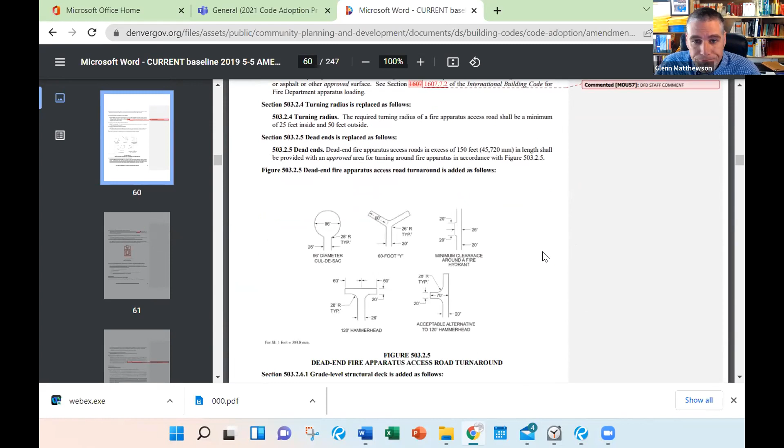Where was that one? Up. Next page up. One more page up. And right there, yeah, at the bottom, exception, low profile bikeway elements. So that seems to be existing language that is speaking to what you guys are talking about, yet this is referencing the width dimension, not the turning radius dimension.

All right. Anybody have anything they want to add before I call a vote? I know you're reading and looking and there's lots to go over, but we also need to move forward. So where am I at? Where's the proposal?

Oh, nope, that's not it. Okay, I am going to call the- is this the one that I just modified? No. Gee whiz, I have too many things open here. This one. All right, this is the modification right now. Any last comments? Because I'm going to call the vote. Doesn't look like it. All right.

All those in favor of this proposal number 75, as further modified by the highlighted section you see on the screen, where approved by the fire code official, pedestrian and bicycle facilities shall be permitted within the required turning radius dimensions of fire apparatus access roads. All those in favor, please raise your hand.

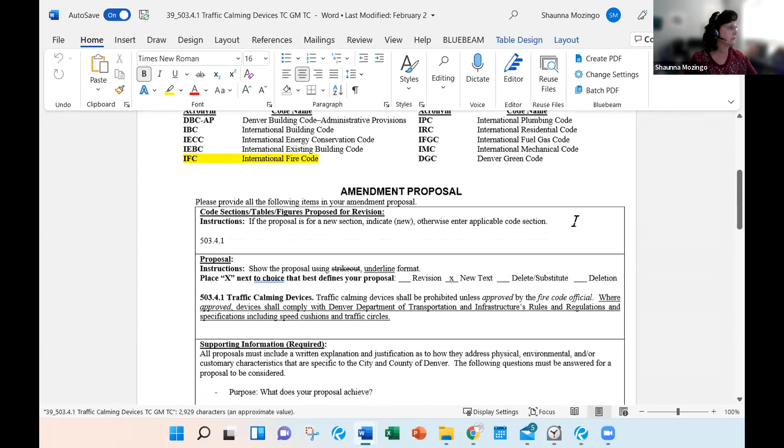Okay, next on the agenda, item number 39. We haven't talked about this one, so this is a new one. Tony, this looks like your proposal. Do you want to speak to this one? There you go. Yes. All right, section 503.4.1.

So we'd be modifying it again to acknowledge what DOTI is attempting to do, including speed cushions and traffic circles, acknowledging that those are acceptable within our routes. So the proposal would read: traffic calming devices shall be prohibited unless approved by the fire code official. Where approved, devices shall comply with Denver Department of Transportation and Infrastructure's rules and regulations and specifications, including speed cushions and traffic circles.

Thank you very much. To the public, for testimony in support of this proposal? Anybody? Testimony in opposition? Anybody wishing to speak in opposition to this proposal? No? All right, committee, any questions of Tony?

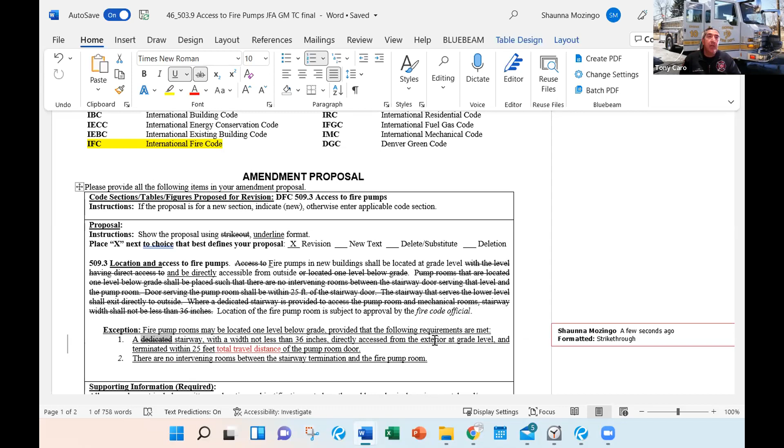I think historically we've seen exit stairways utilized, which by default would have a rating depending on the number of floors interconnected. So it's typically 1 hour or 2 hour rated enclosures. If we say exit stairway, is that sufficient, or does stairway imply that it's an exit?

Where are you wanting that? Right here? Okay. I think, Mike, they still could use a dedicated stairway if they wanted. And if you're only interconnecting those 2 levels, you may not need a rating. Yeah, so I think the way it reads would cover both conditions.

Shaunna, do we need a motion to modify, or can we modify language now? Yeah, I would take any kind of motion. You could say you want a motion to further modify by what we've already done, or modify it even further. Or can we continue to modify? Yeah, we can continue. Just say you want to move to further modify, and then you can keep modifying however you want to. The motion would be great. Okay, so I'll make a motion to move to further modify. Okay.

Second. All right, so there is a motion for as modified with the intent to further modify. Tony, do you want to talk about that modification?

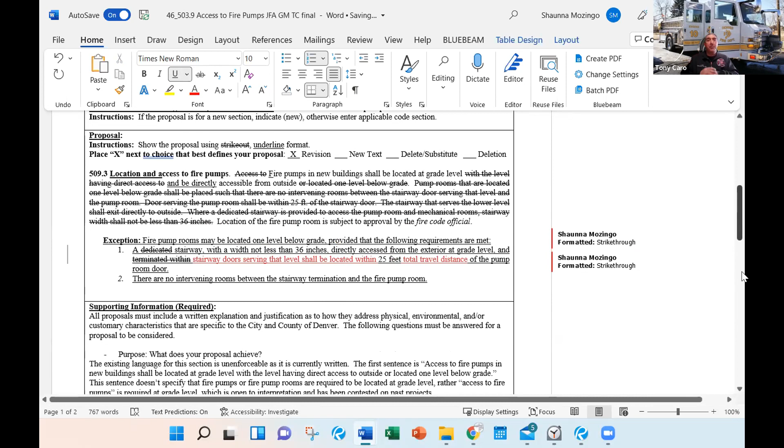Yep, thank you. A stairway with a width not less than 36 inches directly accessed from the exterior at grade level, and stairway doors serving that level shall be located within 25 feet total travel distance of the pump room door.

I don't think doors should be plural, should just be stairway door. Yeah, door, yeah, I agree. And the stairway door serving that level?

I don't know, how do you enforce that if you don't have a stair enclosure? If your stair is open? Well, isn't this referencing a measurement to the exterior door that opens to the stairway?

So are you saying if you had an open exterior, open air stairway? Well, stairway door, typically, most of the places in the code where they talk about a stairway door, they're talking about a door into the enclosure. Right, and you might have a stairway that is not enclosed on the inside of the building that's going down to the pump room. And you're saying from that door there, but what if there is no door? It's not an enclosed stairway. So the base of the stairs or the...

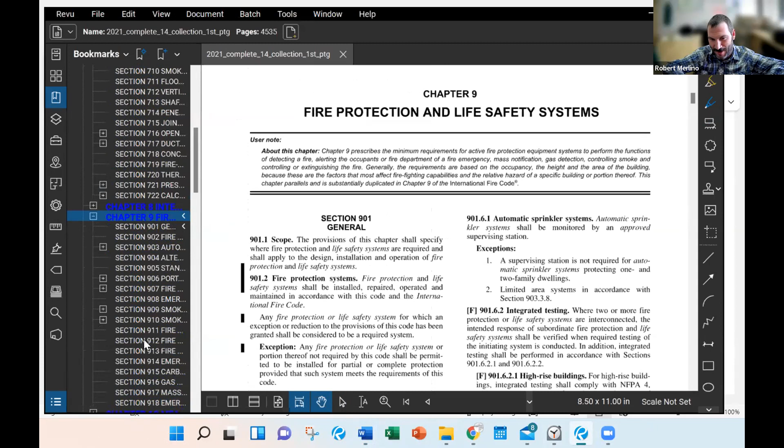Could you bring that section up? Of the IBC? Yeah. I think that section's controlled by the fire code committee, right? So the fire code has it, but it just references back to the building code. What did we say, 913? NFPA 20 speaks to the rating of the access.

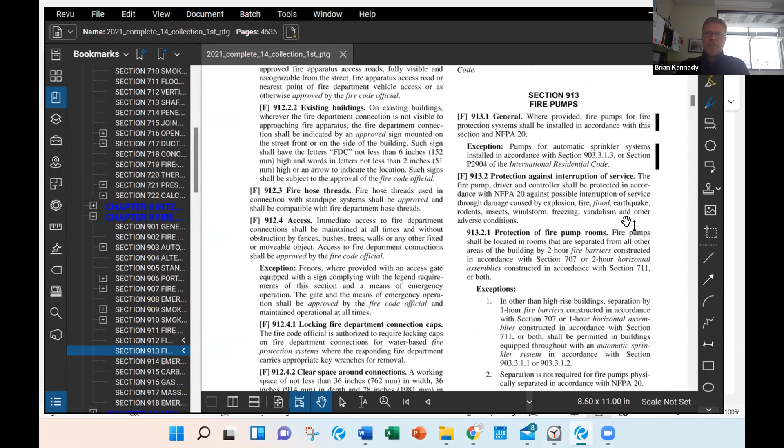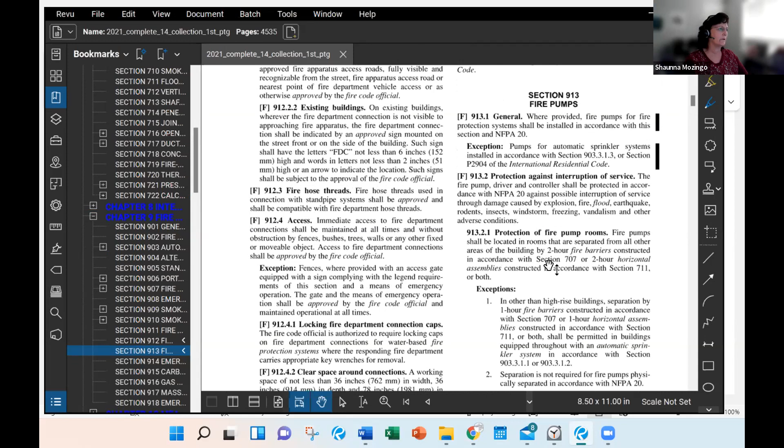Is this the section you said, 913.2.1? Yep. Because that's requiring... oh, well, I guess there are some exceptions. So there's a requirement for a 2 hour rating. There's a 913.2.1 in the fire code as well. It should be the same.

It doesn't talk about the path to the pump room, it just talks about the pump room itself. NFPA 20 says that portions of the building needed for access are required to have the same resistance rating as the fire pump room.

Yeah, that's what I'm saying. It's referencing you to NFPA 20. I don't know why we don't take that NFPA 20 language and put it in there instead of trying to create language. Yeah, I guess I would have to agree, if that's the intent. I'm a little surprised that is the intent, I don't think it was meant to be that way when we initially put that section in there. But if that's the intent going forward, just point to NFPA 20.

Brian Kannady. Yeah, I was mentioning the NFPA 20 with the equipment access. Yeah, okay, I see your hands are still raised, so I didn't know if you had something else. All right, so we could take the wording out of NFPA 20 and put it here.

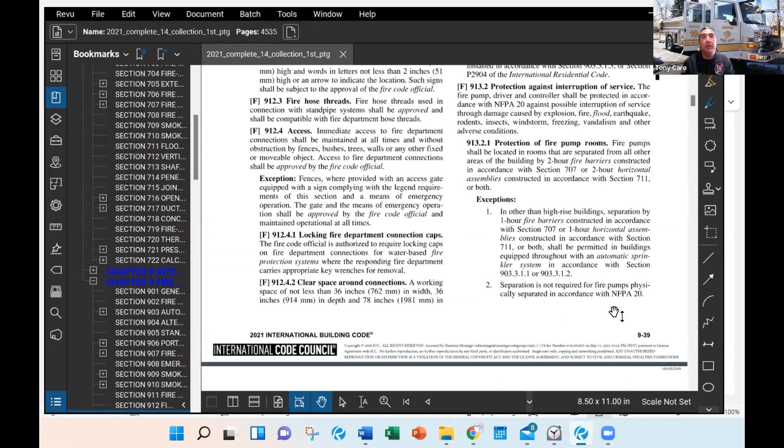Yeah, and I think our section just captures that we intend the path to be protected equivalently, correct? Right, egress from the exterior, not from the stair, but from the exterior, right? Should it say access path? Because it's not really an egress path.

Right. Do you know what section of NFPA 20? Yeah, that's standby, it's in the appendix. I'm looking at section 5.2. I was looking at 414.2.1, 2.12. 414.2 is what I'm looking at also, of the 2022 version.

All right, George. I think possibly we're overthinking this. We're spending a lot of time rewriting it with more words than what was up there in the first place. And what was up there in the first place has been dealt with for the last 15 or more years. I think Michael brought that point up, that pretty much most designers have a supposition of what this means. At least at this point, trying to come up with wordsmithing with less words or more simplified words or some other direction.

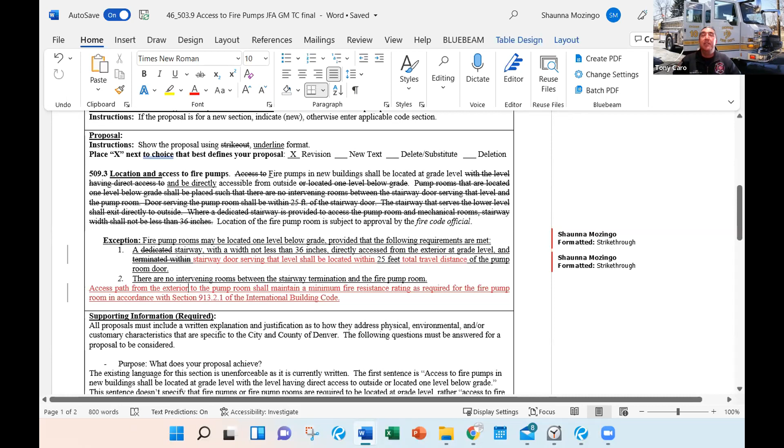Tony. Yeah, I think we're really close, and this would really help architects who are laying out the rooms and doing these fire pump room designs, because most of them are not familiar with NFPA 20 and don't have NFPA 20 available. So I think if we include this language, it's really beneficial to them.

Robert. Yeah, I'll throw another wrench in this. Reading further into NFPA 20, specifically about access to the fire pump room through other parts of the building, NFPA 20 gives you an out to not require a rating that would contradict what's being required by the IBC, or potentially what we would write here, and whether we would reference the IBC or NFPA 20. So I think it's important to clarify this, but I also think it requires some more thought in how it's written.

Okay, I would add to that real quick, looking at NFPA 20, it uses the term fire resistant rated corridor from an enclosed stairway or exterior exit. So there is certainly some different and critical language used in NFPA 20 that's not being used in this current proposal, and it gives you an out. I guess that's to address Brad's concern. We haven't always had it required to be protected. If there's an out for it, is that something we could consider as well?

So the specific language is: where a fire pump is installed in a parking garage or some other portion of a building separated from the rest of the building by fire rated construction equivalent to the pump room, and the portion of the building containing the fire pump is protected by a sprinkler system that does not rely on the fire pump, the protected access to the pump room shall not be required.

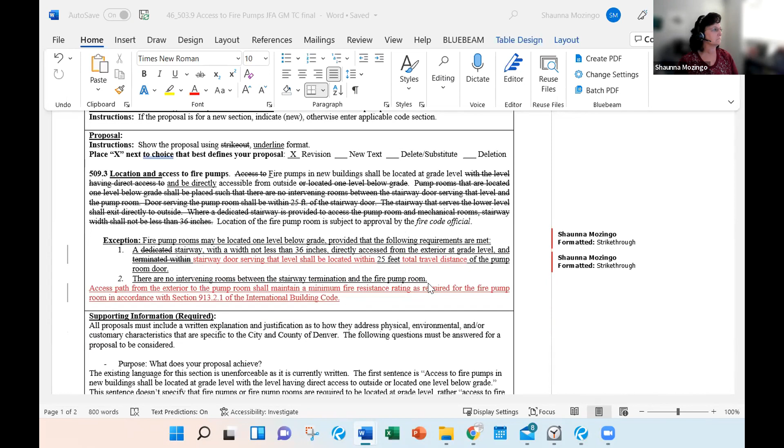All right, we've got to come to a decision right now. We're either going to table this or we're going to move forward. The motion on the floor right now is as further modified, so I would need a new motion to table, or we need to figure this out. A motion to table this, and I'm happy to be involved to help rewrite this if we want to continue to push this forward.

Second. All right, so a motion to table it. Whenever we table something, we have to have a date specific. So do you think this is something you could tackle right away while it's fresh in your mind, and we can bring it forth at the next meeting? Yes, I would be willing to do that.

Okay, so we're going to put together a working group, which is going to include Robert, Glenn, Tony. Anybody else want to be on that working group? John. Okay, John, how do you say your last name? Wojcicki, like 'boy' and 'cheese.' Okay, just like it's spelled. All right, I just don't want to butcher people's names. So, Robert, Tony, Glenn, and John Wojcicki.

Gotcha, we're going to do that and bring it back for the next meeting. Sound good? All right. Shaunna, will you email this version here to us? Yes, absolutely, as a working version. Thank you.

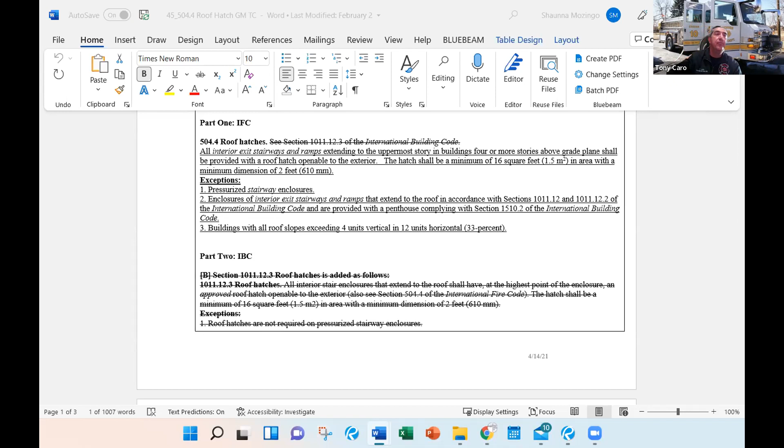Okay, thank you, Brian. Yeah, I agree with what John Wojcicki said, that it's common that when there's a requirement in the fire code that comes from the mechanical code, we see an F next to it, or vice versa. You can see an F in brackets in the mechanical code. So as far as your committee goes, I don't think this affects your committee's decision. I think this should be in the IBC committee when they hear this, to add an F in it. And I think the building code committee should consider that and add an F.

I don't believe you are voting on the IBC portion today. So I think as far as your vote goes, you should approve — my opinion would be to approve the IFC one and then add a note later. Or if I'm on that committee, I can recommend that you add an F to it if we can at this point. But I don't think that should sway your decision from passing this currently. Gotcha, good point.

Thank you, Brian. Anybody else? Yeah, you truly are not voting on this part. It's just there for your reference. This is what you're voting on.

All right, the motion on the floor is for as submitted. If there's no other discussion, I will call the question. All those in favor of as submitted? Now I have 13. A vote of 13. All right, let me lower your hands. All those opposed? All those abstaining? Nobody? All right, so item number 45 has been approved as submitted, 13-0.

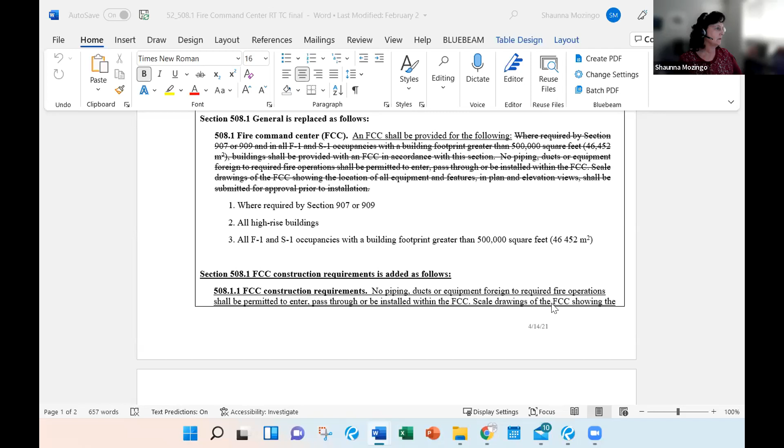Thank you. So this was intended because it's part of the second part. It was two rooms. One was a fire command room and the other one was a fire command center. We were trying to get specifics on the fire command center based on there was confusion with the fire command room, which is the next proposal. Oh, I see, so you have two proposals right in a row. One's for the Fire Command Center and one's for Fire Command Room. So this one that we're seeing right now is for the Fire Command Center.

Shaunna, could you add an additional .1? It looks like I missed that in the review of this section, 508.1.1. Thank you very much.

All right, any testimony, anybody else wanting to speak on behalf of the public in support? Anybody want to speak in support? Anybody in opposition? Opposition? Committee?

Hello, committee. Rich, I think this just addresses that the base code added F1 and S1 occupancies. I don't see any other change than that. Is that your perspective? Correct, right, because we were based on F and S1. There's been some million square foot F1, S1 buildings around that would probably benefit from having a fire command.

Yeah, a larger fire command. And then Glenn, if you can look at the numbering scheme, because we already have a 508.1, we already have a 508.1.1. I don't think we want to undo some of that in there. So just look at your numbering. But there's nothing in here that's taking anything away. It's just basically aligning to the current base code, which did add those two sections. Correct, that's correct.

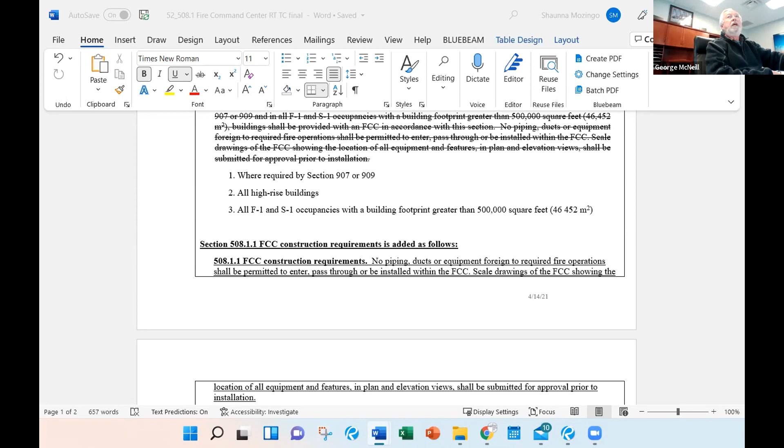Yeah, and Greg, we do need it because the base code doesn't have 909 smoke control driving a command center like we do in the Denver amendments. Thanks, Tony. I just wanted to make sure that the existing 508.1.1 location and access isn't intended to be removed for this. It isn't overwritten, and that's what I was referring to when I was talking to Glenn. Okay, thanks. I saw that too, Brian. No, that's my oversight, and we'll get that taken care of in final formatting.

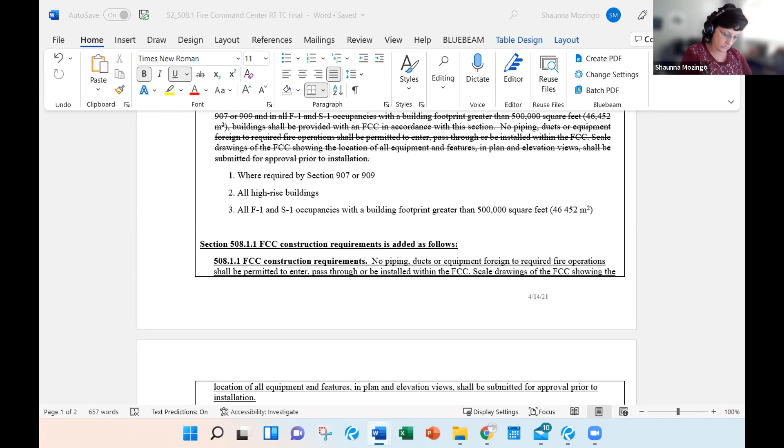And if this is the right place, getting things along, I'd like to approve as written. Make a motion to approve as written. Okay, approve as submitted. That's George. Is there a second? Second, and that was Brian. Glenn. No, not Glenn. Brian. Okay, Brian Kennedy, sorry.

All right, there's a motion and a second for as submitted with some apparent editorial stuff that we'll have to fix. I guess I would ask if you guys have any discussion before I go to the public. Nothing? All right, public, there's been a little bit of testimony, not a lot. So if you have anything to say about what we've just talked about, now's your time. Anybody wishing to rebut anything they've heard? Nope, okay, here we go.

Committee, it's been moved and seconded for item number 52 to be approved as submitted. Seeing no, well, you're raising your hands, there you go. All in favor. I'm not gonna wait. All right, awesome, that's a count of 13. And that's only people we have present is 13. So that has been approved 13-0.

All right, excellent. Let's go to then, that's going to save that because I have autosave on. All right, so that is item number 52. Now we're going to go to 52, or I mean 38, excuse me, 38, which is the rooms instead of the centers, right?

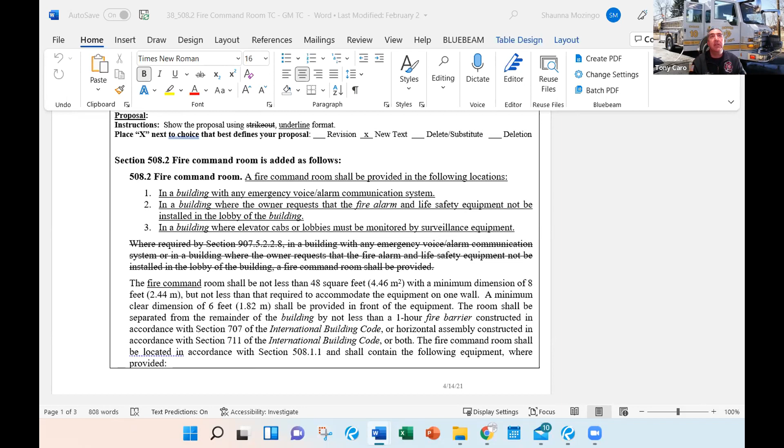Tony, you want to address that? So John, you're thinking there'd be confusion as to whether a room or a command center would be required? Because I think the prior section was clear - if you're a high rise, you have to have a fire command center.

Yes, and I would just say you could clarify by saying a fire command room shall be provided in lieu of a fire command center in the following locations.

Russell Holt: One of the confusions is in low-rise buildings, we don't have fire command centers, but we still have, at 60 feet, to have an emergency phone and some other apparatus at times. Sometimes with permitting, because of the layout of the building, they ask for a lobby panel. Instead of putting that in the lobby, a lot of times Denver Fire wants us to put it in the room they've designated - a fire command room. It's not really designated a fire command center because it's not high rise, but into a room as well, where the fire alarm equipment is.

Going back to the public, I have Brian Lucas. Thank you. I would just recommend adding where the requirement for surveillance equipment is required. Right now, that could apply if an owner chooses to install video monitoring in their 2-story building, and I believe this is required by the elevator code when the building exceeds 60 feet. I may be incorrect, but I'd recommend adding 'where surveillance equipment is required by ASME 17.1,' or if there's another section that requires it - because someone puts in surveillance equipment that's not required by the elevator code or the fire code, I don't think that's the intent here.

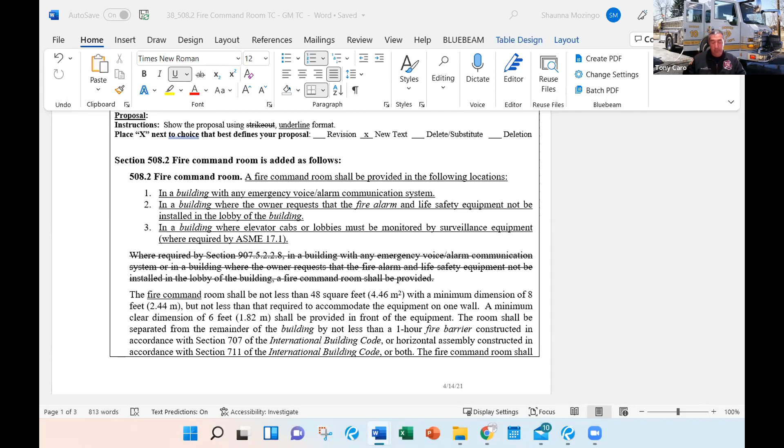No change there, George. I think this provision's been in the code for two cycles now. Well, I haven't been upgrading for two cycles - it's been relatively recent. Yes, I believe it's been in there since the 16 amendments. Well, you know how many we've done, and we've recently just done two. So I just want to make sure they've had an opportunity to see it.

Anybody else from committee? Somebody's phone is not muted.

Anybody else from committee? Yeah, I have a question on the wording of the room size. Is the intent to require a minimum dimension of 8 feet in two dimensions? Because if that's the case, that doesn't line up with the 48 square feet.

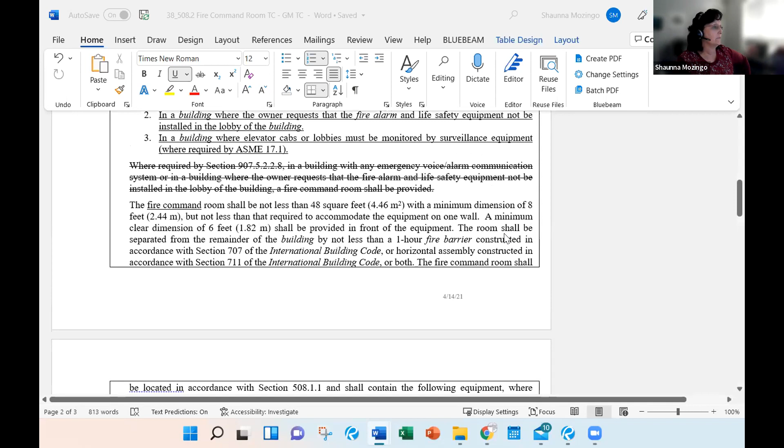Scroll up. This appears to be existing language. Yeah, that is existing - there's nothing being changed there. That doesn't mean you can't modify it, but no - it's an 8-foot wall with equipment on it, and you need to make sure you can back up 6 feet along that wall. It's 48 square feet.

So then is the intent that both walls measure a minimum of 8 feet, or just the one? Yeah, I think an 8x6 room, Robert, is the intent. Okay, just a little confusing.

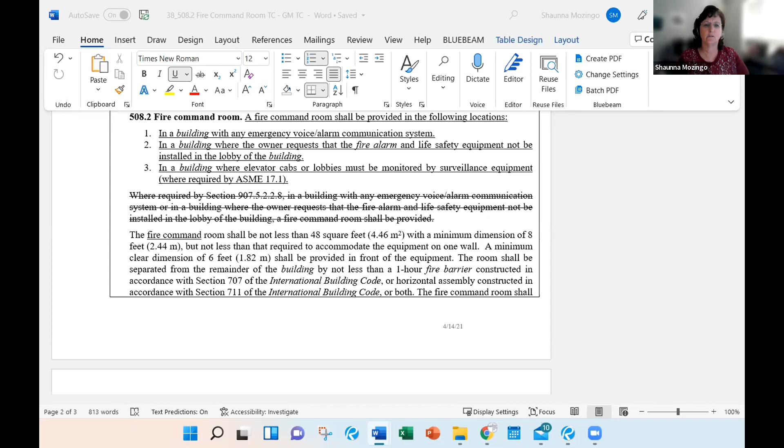Wayne, they decided to just have conversation between the committee - you don't have to raise your hand. Thank you for that, so I just wanted to make sure.

So I'm looking at the previous amendments, and as far as I know, fire command room is not defined, right? So I'm trying to understand - I think the intention here is that for a building that's not a high rise, not explicitly required to have a fire command center per 907 or 909, the requirement would be less arduous overall, but still maintain the intent of the fire command center.

Assuming that's all correct, the amendment alludes at the end there that the fire command room shall be located in accordance with 508.1.1. 508.1.1 is the fire command center provisions. So are we treating these as synonymous with one another, or should we define the differences?

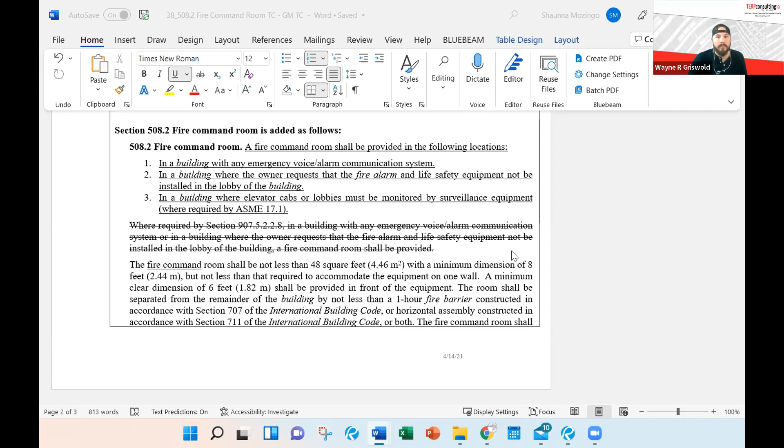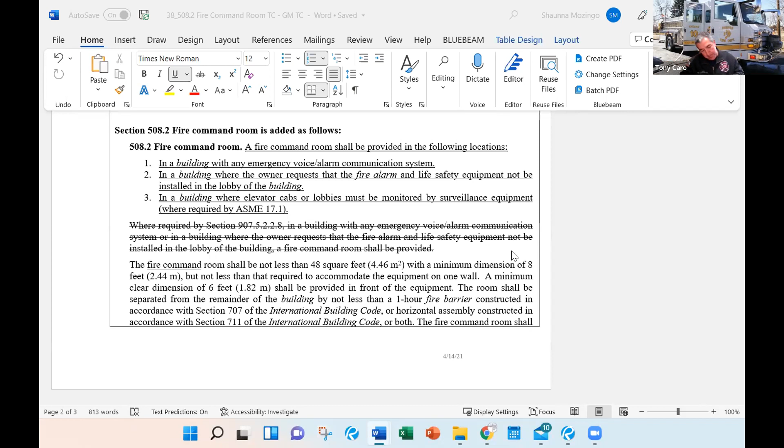Yeah, I think that's just referring you to the provisions that tell you where the room should be located, which has three items - be on the ground floor. Well, it tells you where the fire command center should be located. Yeah, and I think we're just referring to using the same location topics or parameters. Does that make sense, Wayne?

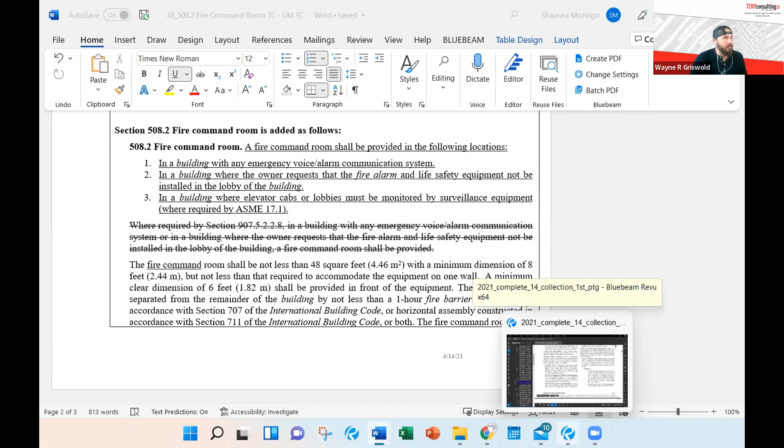So if we refer back to 508.1.1, it's location and access, right? So location then is defaulting to the F1, S1 occupancies over 5,000, 100,000 square feet. I'm not seeing - yeah, I think we need coordination on the sections. Well, that's kind of where I'm going with it. It seems like this fire command room, as it's defined, would not necessarily be the same requirements as the fire command center, if I'm understanding the intention here.

It would for location and access. For location and access, okay, access I agree. Location would just be - hold on, let me look back at the amendment. Yes, I think they have it up on the screen. Well, that right now on the screen is your current amendments, right? And then if you want, this is the proposal.

If I may add, I think some of the confusion is the term 'location' being used in 508.2. A fire command room shall be provided in the following locations - that's really not referring to a location within a building, and maybe that's a poor term. It's referring to the following buildings. So 508.2 is identifying the building designs that would require it, then pointing you to 508.1.1 for locations within said building.

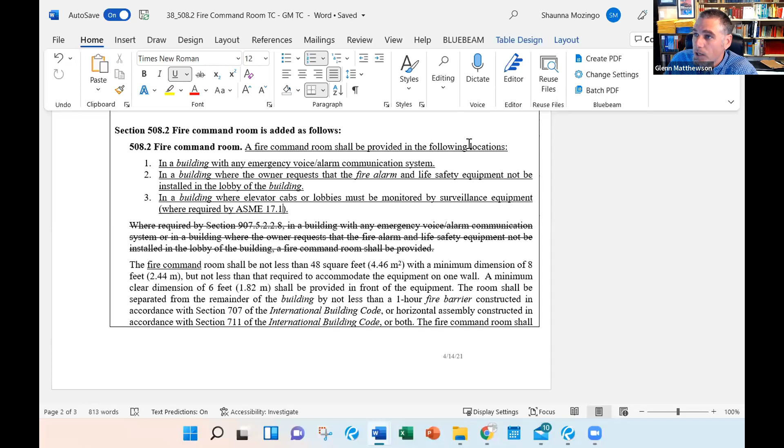Yeah, Glenn, do you think we should replace 'locations' with 'scenarios'? I do - I would, or 'conditions' or 'buildings'. You can simply say a fire command room shall be provided in the following buildings, and then we can clean up the use of the term 'building' in each of those three exceptions. But that might help clarify the differences between this term 'location' being used twice. Yeah, good point.

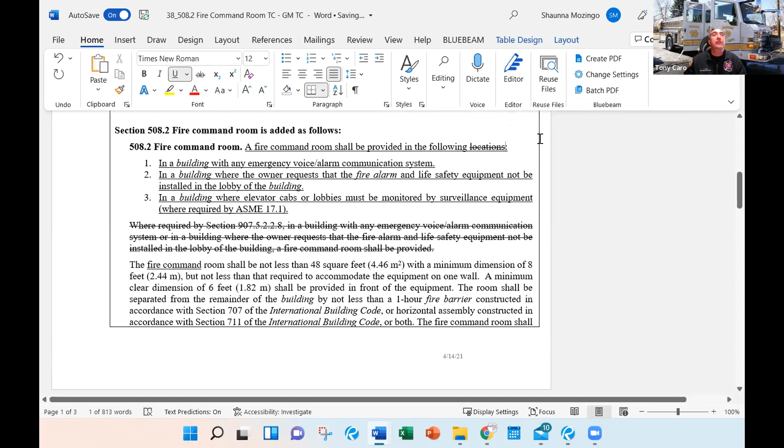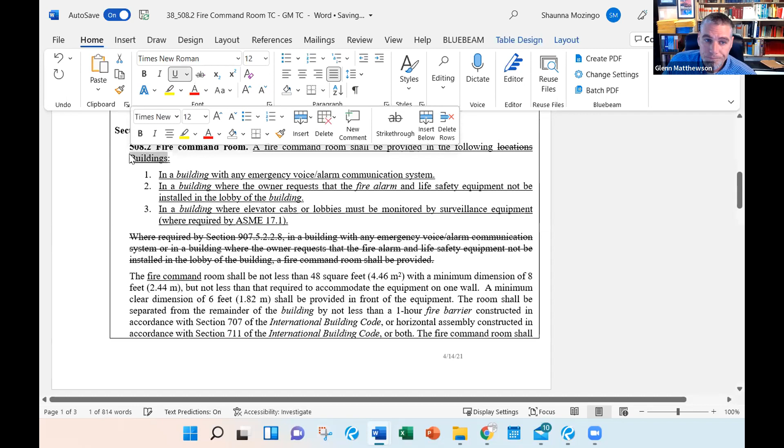Honestly, a lot of times you could leave it just as is in the following section. That's really likely sufficient as is. That's probably true too. Yeah, there would be less cleanup of having to go remove all those words building, because you put it up here.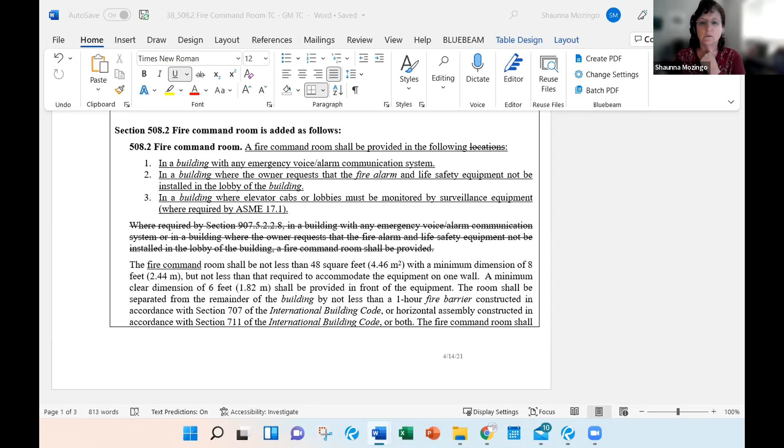All right, I need to go to the public real quick. There seems to be, Mike, did you have something to say on this? No, I just didn't know if I needed to raise my hand again to talk. Yeah, I mean, your hand is raised, that's why I'm asking, do you want to talk? No, I don't need to, I raised it again to respond to George. Oh gotcha, okay, all right.

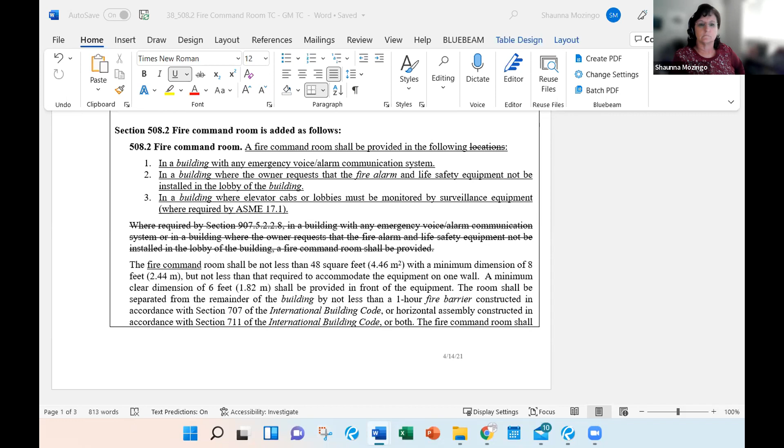Anything else? So right now we are back to the committee. You want to have a motion? You want to have further discussion? What do we got going on here, guys? So we can get to another one.

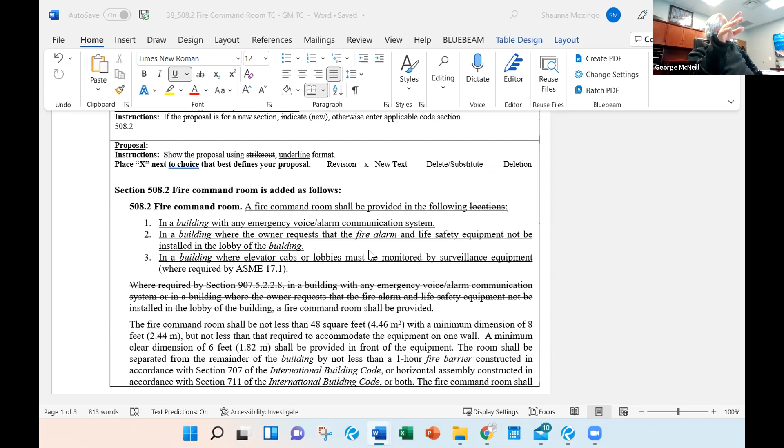I've got one more question. Wayne, are you satisfied? I mean, you see where that 508.1.1 is just defining the physical location of what they want to do with command rooms. It's just trying to keep it in the same realm. Yeah, I think I'm following along here.

I still think it's confusing, the use of room versus center, and I'm not sure that it provides clarity. If we're trying to specifically identify different criteria for a room than a fire command center, then I think it should be a defined term. But I think I understand the intention of it overall.

This couple of code cycles was basically added because it was up to the inspector or up to an engineer, it was very subjective as to what an enclosure meant for this equipment. So coming up with the fire command room a few cycles ago, this was a compromise that I thought worked out for everybody, because at least we know what the minimum square footage is and so forth.

With all of that, I make a motion to accept as submitted. Okay, there's a motion by George for as submitted. Is there a second? I'll second that. Okay, Tony. All right, some discussion.

Yeah, do we want to go as submitted? Because on number, taking off the 3, locations. I'm sorry, Glenn. Okay, as submitted with the intent to modify. Okay, I overlooked that, sorry guys. That's okay, no worries.

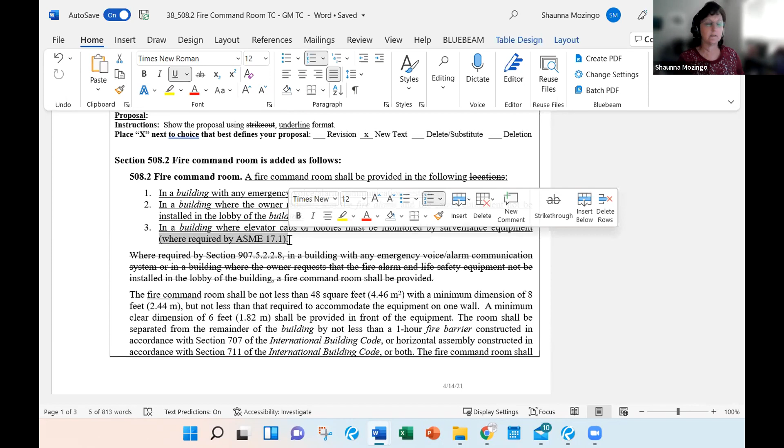And in number 3, we want to maintain where required by ASME 17.1, correct? I put it in parentheses because that was provided by somebody from the public, and it was not provided by the committee. So if you want that, I'll take it out of parentheses and make it part of it. I think we want that, because if a building owner doesn't have the requirement to put it in, he shouldn't be subject to having to follow this guideline. Yeah, I agree.

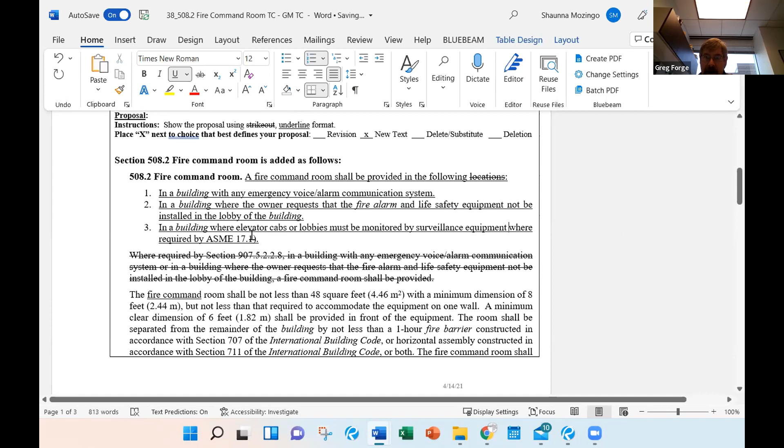Thanks, Greg. Yep. All right, so I have as modified by removing the word location and by adding where required by ASME 17.1. Anything else?

I can't go back to the public because we are in the motion and second phase. We've already, well, did we do rebuttal? All right, this one time, John. This one time I didn't ask for rebuttal. You're right, go for it.

ASME A17.1 - oh, you're missing an A. Thank you very much. And there's a reference to...

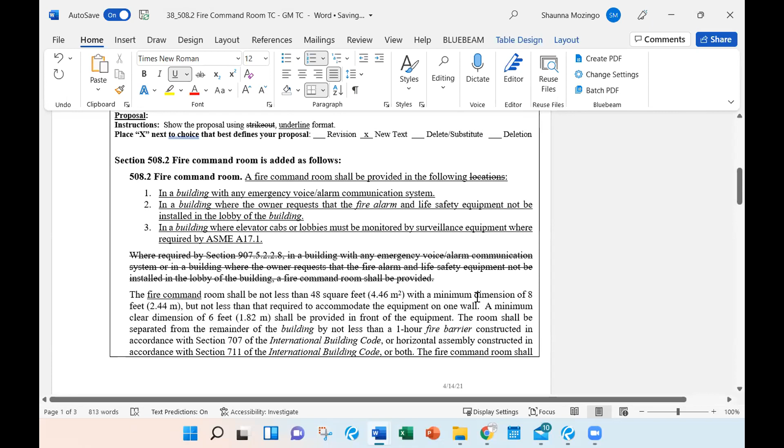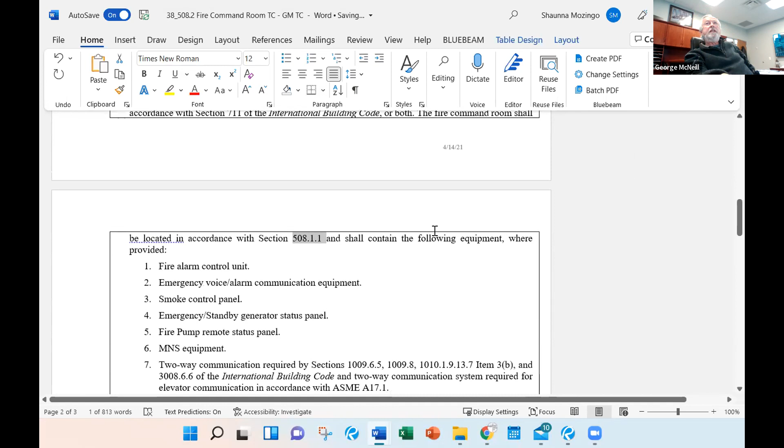508.1.1, which has been adopted previously, and that needs to be coordinated here as well. So this 508.1.1 will have to be coordinated with that. John, you're absolutely right, this was the discussion under the command center when Glenn needed to fix the numbers. So yeah, it applies the same way.

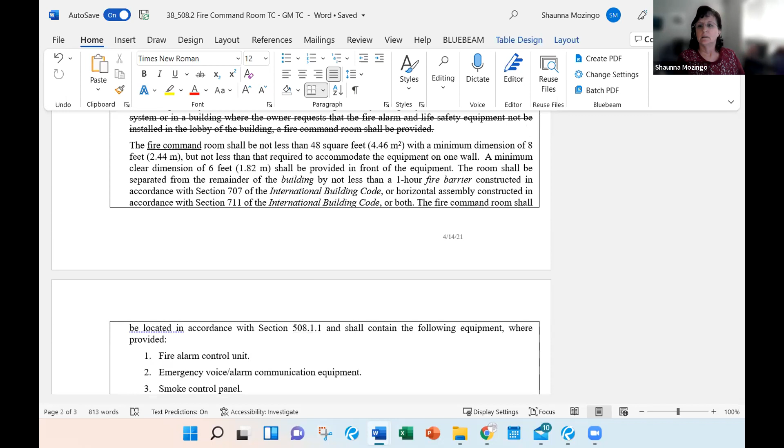Okay, yeah, we don't want to overwrite that section. Right, we need to coordinate sections, and Glenn's got that down. Perfect, thank you for that. All right. We have a motion for as modified with those two modifications and the understanding that we're going to correct any section references.

Any other discussion? Mr. Holt? I'd like to call for the question. Yes, let's do it. All those in favor of as modified as shown on the screen?

All right, I show 11. All those opposed? All those abstaining? 1. There we go, we went back down to 12 people. All right, so 11 to 0 to 1. All right, so that has passed as modified.

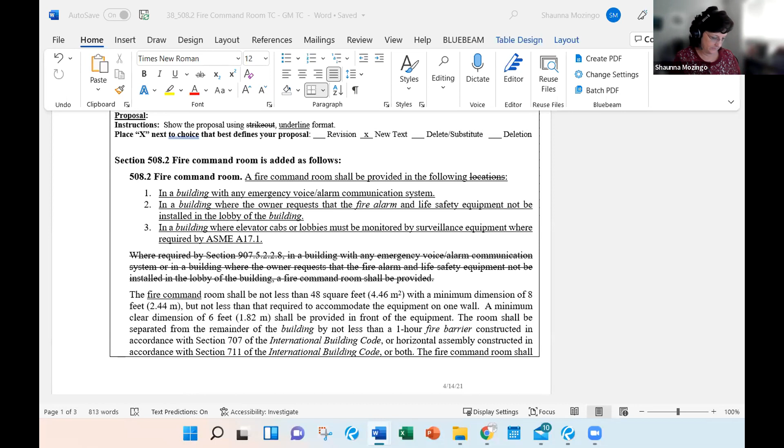Let's go to item number 64. Tony, this is you. And section 510, emergency response.

All right, this is an interesting one. So what's resided in our Denver amendments was language we created back in 2008, prior to the base code having any direction on radio enhancement systems. So in the last 2 cycles of the base code, they've really improved the language and provisions. So I've modified our section to adopt all the new base provisions and then keep the old important language on how we test systems still in the code.

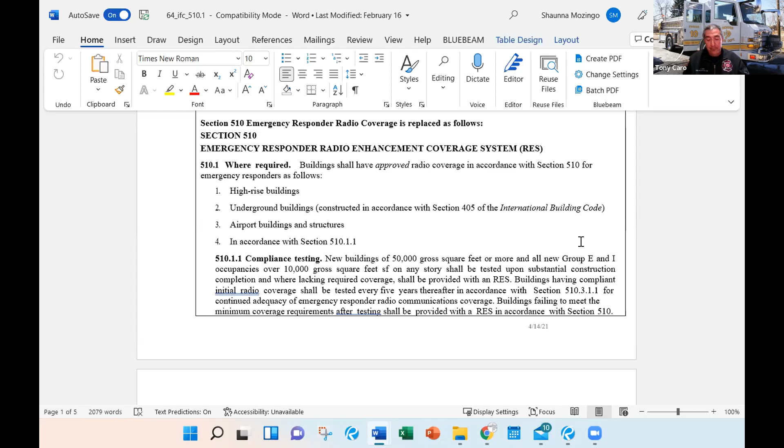Any testimony from the public in support of this proposal? Testimony in support? Testimony in opposition? Anybody in opposition to this proposal? Committee?

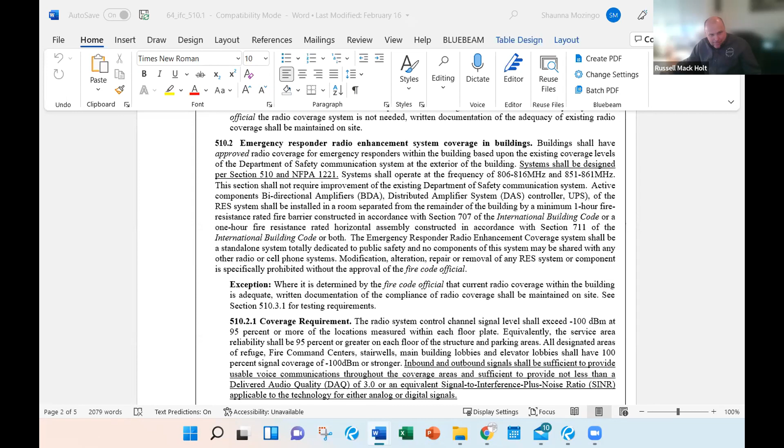I make a motion we accept. Who was that? Russell Holt. As submitted, Russell, is there a second? I'm sorry, I didn't hear. What was that? I make a motion we accept the proposal as submitted. I'll second the motion. Okay, Tony second, thank you.

It's been moved that item number 64 be approved as submitted. Is there any discussion?

Only question I have, Tony, is the underlined portions, the added portions, essentially what's been in the policy? Because what I'm looking at here, most of these things, especially the system monitoring, we've been applying currently and have been doing that for a few years now. So can you just address whether these underlined portions are already in your policy? Is this just getting it codified, or where did the underlined portions come from?

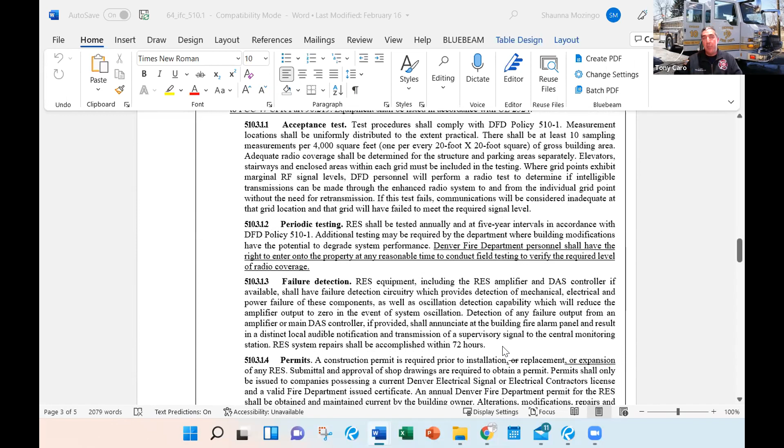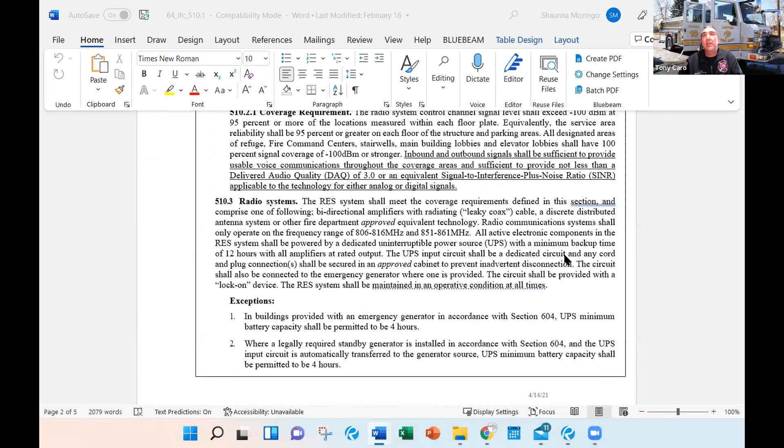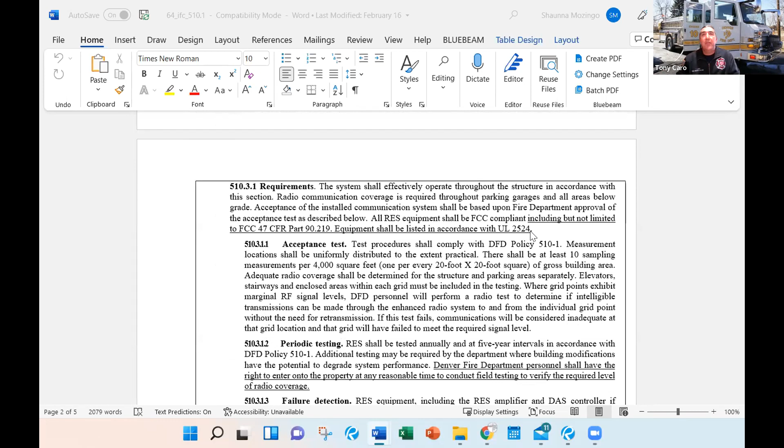Yeah, the bottom half I don't question or I'm not concerned about, because you're right, it's the way we've been testing, the way we've been building. I am a little bit concerned about the UL listings, because are we limiting manufacturers? Not all of them, the UL 2524, I don't know that everybody has been listed under that yet. Yeah, that's a great question, but there currently are 5 manufacturers that have passed testing. Okay, so it's not just one. Correct. Yeah, for a long time it was just Honeywell, but now, as of last week, we have 5 different manufacturers. Okay, very good.

Anybody else? Under the system monitoring, are all those points monitored by the head end that we just pick up points from? The intent isn't to modify the device as it comes from the factory, is it? The equipment, Brian, has these built in now because these have been a requirement for UL. And so we've reduced it to about 2 contacts, not 8 contacts, but different manufacturers reduce it to different levels, but they're all there now.

Anybody else? Hey Tony, real quick, 510.3.1.2 periodic testing, the sentence you added: Denver Fire Department shall have the right to enter onto a property at any reasonable time. What type of impact on a new high rise would that be? I mean, is it just the crews walking around and not being disruptive? What exactly does that look like?

Yeah, typically the line shop has a dedicated crew that works on these systems. So from time to time, if we put up a certain high rise, we may have to validate other surrounding buildings for continued coverage, so it's usually one or two people. They're always in touch with building management; they wouldn't just walk in there and do the testing. Okay, so it's always coordinated.

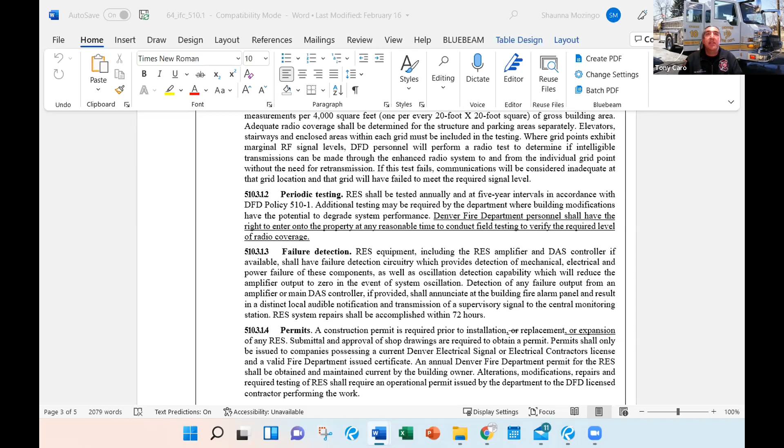There was nothing in the language that was giving us access rights, and we had several building owners question whether we had the right to do such testing. Yeah, I just want to make sure it's not something that's overly disruptive. Yeah, I'll always coordinate it, and it's fairly basic, one or two people. Great, thank you.

Greg, with the technology, the interior stuff should already be at full strength. What a building next door gets built up or how that impacts the antenna, much more so than what's in the building. What's in the building is our bidirectional amplifier. Okay, great, thanks guys.

All right, anybody else before I go to the public? All right, anybody from the public wishing to rebut anything that they've heard? Anybody from the public? All right, committee, the motion in front of you is as submitted. If there's no further discussion, we'll call the question. All those in favor?

And now we have 13 again. That motion passes 13 to 0. Thank you.

We'll get disconnected on the last one. I apologize. Oh, gotcha. All right, no worries. Sorry. No worries. That's okay.